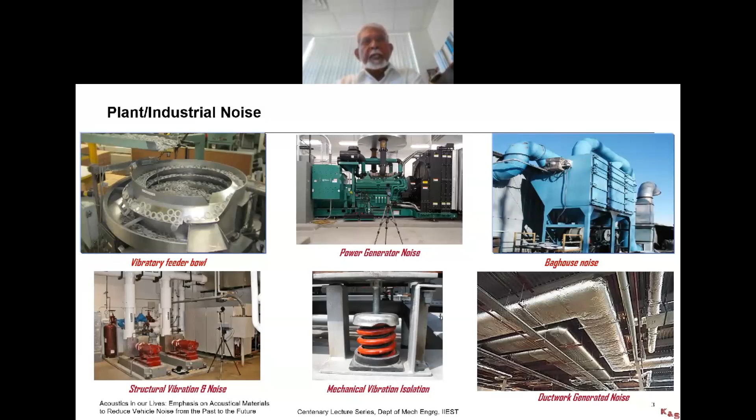We will talk a little bit later when I come to my favorite topic on vehicles about different types of noises. This is a heating, ventilation, air conditioning duct work, which otherwise would generate noise in an acoustic lab where you can't accept that because you want to make measurements of your product in a quiet environment. So these are some different examples or applications of plant or industrial noise that we see every day in one shape or the other.

Some of that noise now comes to the community. This is, I'm making measurements in the property line of the community. This is the transportation noise on these freeways, highways, byways, all these cars and trucks and other transportation systems that are going by, they're generating noise, and that noise eventually comes to the residential area. To block that noise, sometimes we have walls. These walls separate the freeways from the residential areas.

We can do modeling. In today's technology, we would like to do analysis, model, predict. And these models allow us, this is my noise source. This is a pillar or a block or a building, and how does the sound then propagate or radiate to the rest of the neighborhood? If I can determine that, that'll be very helpful.

Sometimes when we make these measurements, we want to look at the noise level with time history. So this particular bottom left slide is showing you the x-axis, the horizontal axis is the time, the vertical axis is the sound level in dBA. It shows you different events that are taking place and for how long those events are taking place. These are all important if we want to reduce the noise so that in the community, people would be in a little bit more pleasant situation.

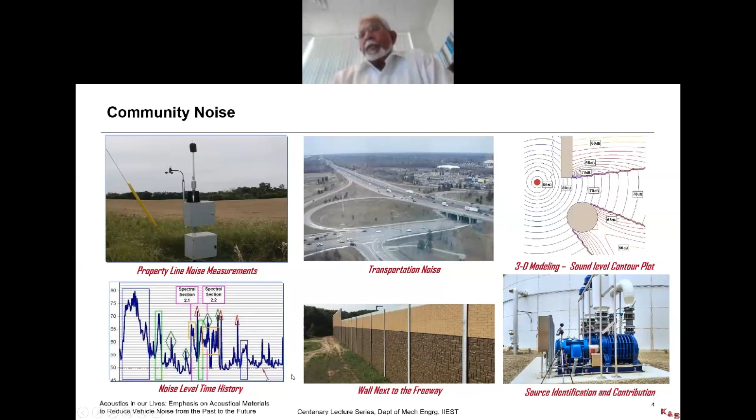This one is the previous slide. The bottom right picture was trying to show noise measurements of the product in the community.

Architectural acoustics. We like to enjoy music. Obviously, the artist is famous, no problem. But the auditorium has a lot to do with it. It's not just the loudspeakers and the microphones. It's the room itself. So these are the seats where people are going to be sitting, and then somewhere here is the stage where the musicians are going to perform from.

We can do ray acoustic analysis. These are the seats. This is the performer. The sound goes up, reflects back, comes to the people who are sitting and enjoying the program. We can determine how much of the sound coming from the speaker or the artist is going to reflect back at different locations.

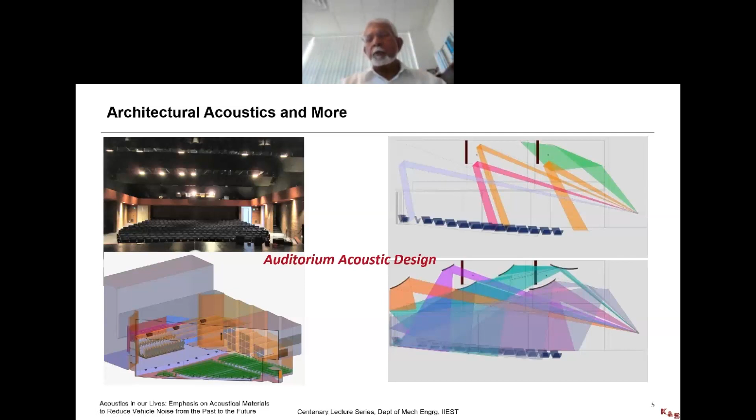Based on that, we may have to add additional diffusers, as you can see, so the sound is more even in that space, as opposed to the very first slide on the top right, which has very discrete sound rays coming. At the end of the day, I would like the entire auditorium to be filled with the sound, the music that we would like to enjoy and appreciate.

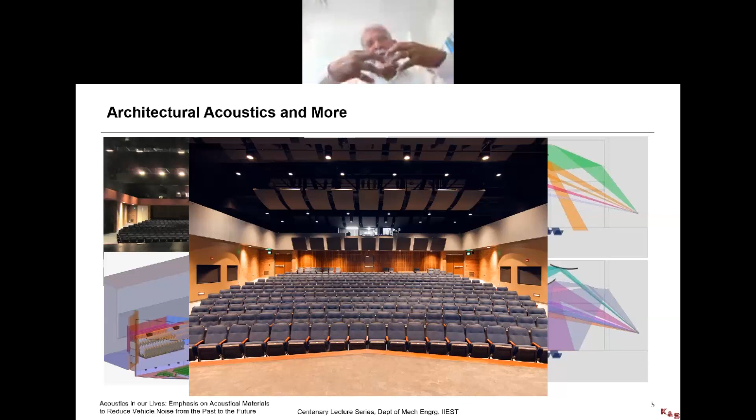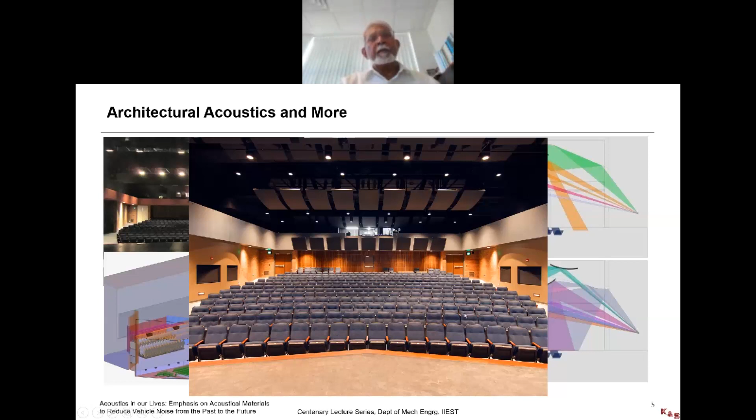So this is what it looks like at the end of the day, where you see all of these surfaces. These are all diffusers or reflectors. They have been specifically designed and placed so that the sound coming from the musician, coming from the loudspeakers, can reflect off and properly disperse where the audiences are sitting.

Now I want to talk a little bit about binaural work. Binaural means the two ears that we have. This is very important because if we can simulate in an artificial head the human hearing mechanism in terms of the spatial separation between the left ear and the right ear and the directionality, then I don't have to always listen to that sound myself. I can use an artificial head with microphones on the outer ears of both ears, record that signal and process it later to understand how we really hear.

Normally, all sounds are measured using a microphone. A microphone measures a scalar quantity, just the magnitude. It cannot give me any direction. But with the binaural head, using the two microphones and the spatial distribution of how we hear, all those algorithms, it can not only give you the magnitude, it can give you the direction the sound is coming from.

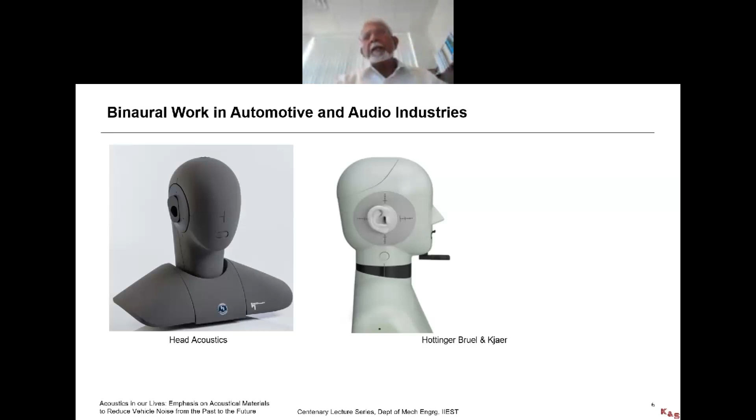If I take this a little bit more advanced, this is another mannequin where sound comes through the mouth because I have passed a signal through its brain. And then there is a loudspeaker here. There's a microphone here. The microphone picks up that signal and then it goes through various algorithms to determine the clarity of that sound that came out from somebody's mouth in a given environment.

Some of you may have heard a term called articulation index. Articulation index means how well can I articulate in a given environment. If I go to a restaurant, everybody is talking. Even though somebody is sitting within a meter from me, I speak and the person cannot hear me very well because the clarity of the sound in that environment is not very good. So in architectural acoustics and vehicle acoustics, articulation is very important, and that's what one of these things can do.

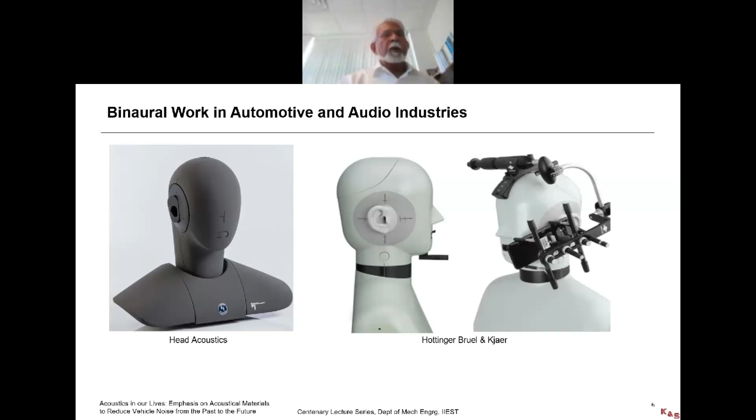Nowadays, we all have iPhones, cell phones, modern phones. We don't want to say, can you hear me? Can you hear me? We want to be definitive that we can hear everybody very well. And this device you can see on the head is actually a rest so that this cell phone is placed properly, putting the right pressure on the ear, the way we would normally hold the cell phone to communicate with someone else.

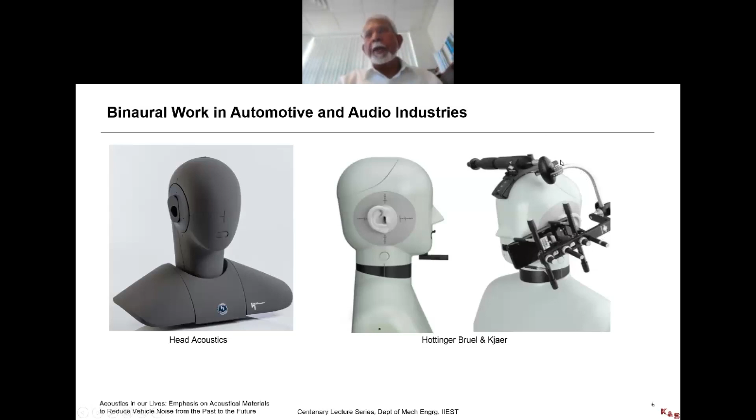And then we send the signal through the mouth. The cell phone picks up that signal, and then we can analyze that data to understand the clarity of the sound. How much force I put on my ear with the cell phone can all be simulated by this big gadget that you see on the head of this mannequin.

Okay. The next thing we are going to talk about a little is how we get from there to here. Now we are getting more into the vehicles.

Building a car has to do with designing the car, development, and its execution. Understanding the noise problem, if you're going to worry about acoustics in the car: we need to know the frequency contents. We need to know the level. We need to know in what environment am I putting these materials.

We listen to the car both subjectively and objectively. We do it subjectively because we want to like the car. We want to understand something called the sound quality of that vehicle. We want to make objective measurements because we need something concrete which we can analyze, which we can rely on to make sure I do the job correctly.

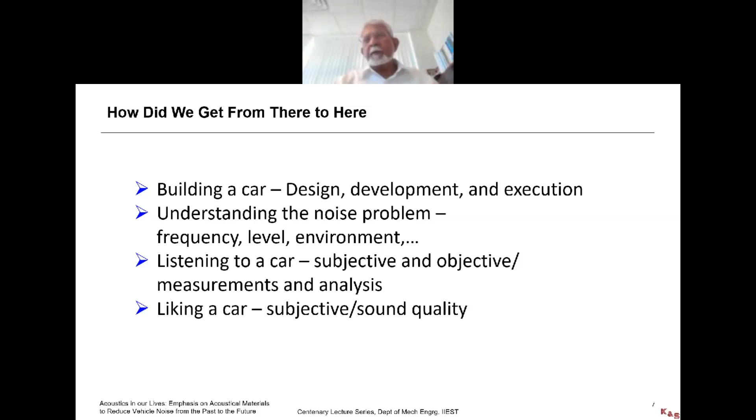Today, my mood is bad. Subjectively, I think it's a noisy vehicle. Tomorrow, I'm very calm, I'm in good shape, feeling very well. The same vehicle that I heard yesterday and complained the noise was too much, today I think it's acceptable. So that's the way the subjective thing works. We cannot rely on that 100%. We need to have objective measurements. We need to be able to analyze and predict information.

In vehicle construction, there are even today two types of vehicle constructions. One is called a full frame. When I say a full frame, that means you have a chassis. The engine is sitting on top of the chassis, and the body is installed on top of that chassis, and the body is mounted to the chassis by something called body mounts. Body mounts acoustically are nothing but isolators.

The chassis is very hot. That means it has lots of energy because the wheels are driven on bumpy, rough roads. So all that vibration energy gets through the tire to the chassis, but the body is isolated from the chassis by using body mounts so that vibration doesn't go through. The only thing that goes through would be the noise of the internal combustion engine, or if we have electric motors, the noise of the electric motor. So the noise we have is airborne noise. The solution for airborne noise is different than if I had vibration issues as well.

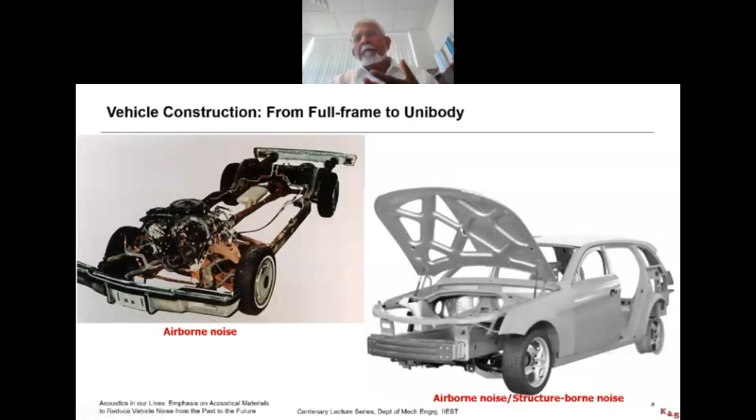Today we have unibody construction vehicles where the chassis is gone. That is necessary for the safety of the vehicle, not necessarily for acoustics. Safety is more important than acoustics on any given day, because after all, we're not going to lose our hearing from the noise in vehicles. So we have unibody construction vehicles, and therefore now the body panels feel the vibration directly, and we need to reduce that vibration.

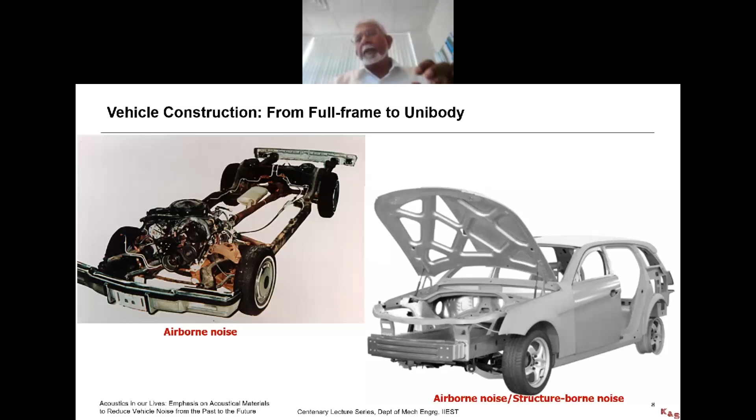Because I don't have a chassis, I'm not going to be able to use an isolator. In order to reduce the vibration on the body panels, I need to use viscoelastic materials, damping materials. That vibration is called structure-borne noise. Damping materials were not used in vehicles until the late 1970s, because around that time we started building unibody construction vehicles. So although viscoelastic materials were well known to acousticians and had been well used all this time, in vehicles it's a new product.

If we now look at the vehicle noise sources, there is propulsion-related noise. That means the moment I start the engine of one kind or the other, I have a certain amount of sound. And then when I operate that vehicle to go from place A to place B, I have additional noises. For internal combustion engines, which we fondly call ICE, the propulsion-related noises are engine noise and transmission noise. The transmission is nothing but a whole bunch of gearboxes, gears. Then we have cooling fan noise, air intake noise, and exhaust noise.

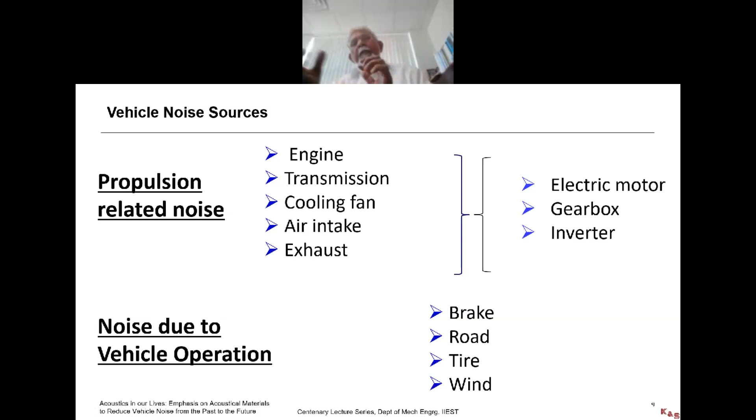For electric vehicles, we have electric motor noise. We have gearbox noise from the electric motor going to the wheels, and then we have inverter noise and other things. The moment I'm driving the vehicle, in addition to this propulsion-related noise, I have road noise, tire noise, wind noise, and brake noise.

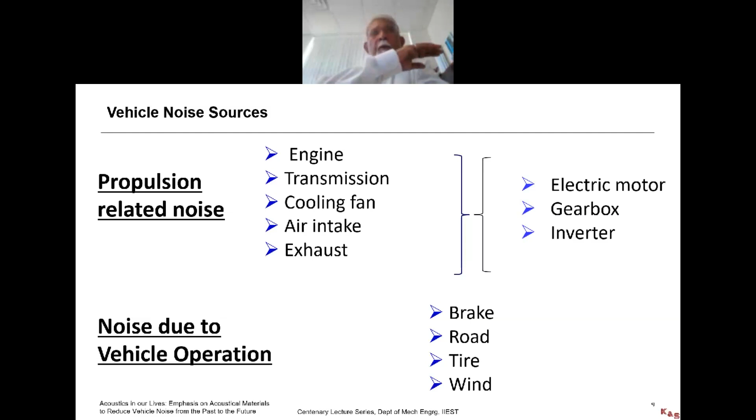So when you drive or ride a vehicle, even though you are riding on the same road surface, some vehicles you don't like the noise of because you hear too much wind noise or too much propulsion noise. Some vehicles you like because those noises are all addressed properly. It's very smooth, it's more balanced, and things like that.

If you look at an internal combustion engine, the primary noise source is the circled one here, the internal combustion engine itself, and then the exhaust noise that you have. Then you have wind noise as you are driving the vehicle. You have tire thump as you are driving the vehicle. And you have many other different types of noises.

Inside the vehicle, you may have air conditioning, or like here, we have to have heaters for sure because it gets very cold. So all those noises are there also for our pleasantness that we would like to have. But the primary noises that we are talking about are the propulsion related noise and the vehicle operation related noise.

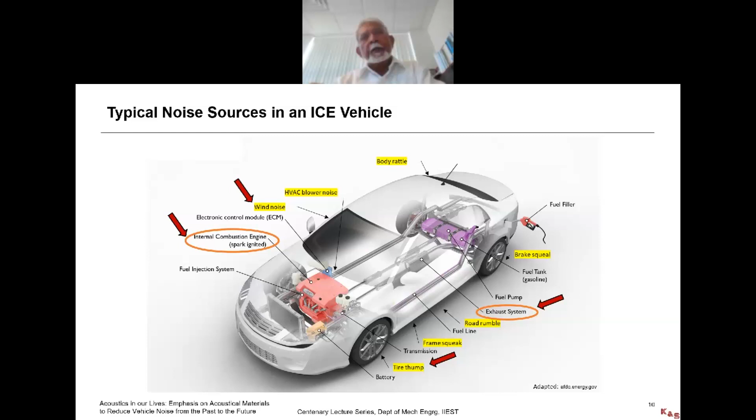In order to solve this properly, we need to understand at what frequency ranges we have these noises. So for an internal combustion engine, there's an induction noise. The induction noise is related to the number of cylinders and the RPM, and that frequency range is somewhere from 50 hertz to about 200 hertz or so. At those frequencies, it is very difficult to solve the noise problem using sound package materials. So we will see if there are other ways to address those things, and some acoustics engineers will work on that.

But then I drive my car. Sometimes I drive on a smooth road. Sometimes I drive on a coarse road. Sometimes there are loose gravels, and they all generate noise at lower frequencies, below 500 hertz or below 1000 hertz. Then I have the engine or accessory noise. That noise is from 400 to 4000 hertz.

The tire noise: I'm driving my vehicle at 60 kilometers per hour or 50 kilometers per hour on a smooth road, and I hear this tire noise. That's around 800 to 2000 hertz. Now I'm on the freeway, on a smooth road. I can drive at 100 kilometers per hour, and I can hear the wind noise. The level of the noise is not that high, but the frequency range of the noise is at a frequency that I can tell the difference. It's 2000 hertz and above.

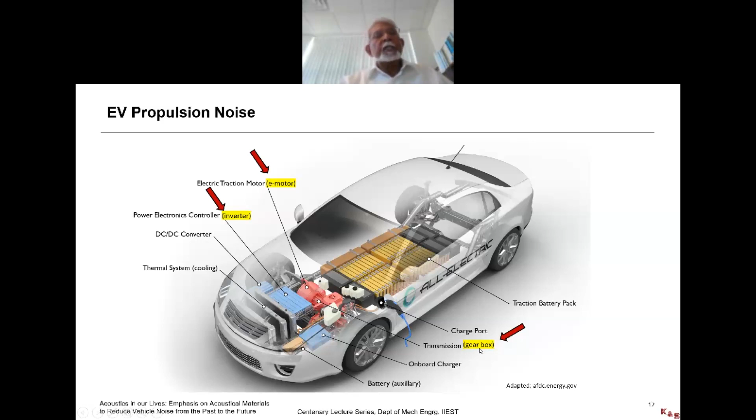Right now, I just wanted to mention the electric motor itself makes noise at different frequencies that we were not used to hearing before. Then it has inverters to change the battery voltage to be able to run the electric motor. That inverter makes noise. We have gearboxes. The transmission itself makes noise. So there are noises in electric vehicles.

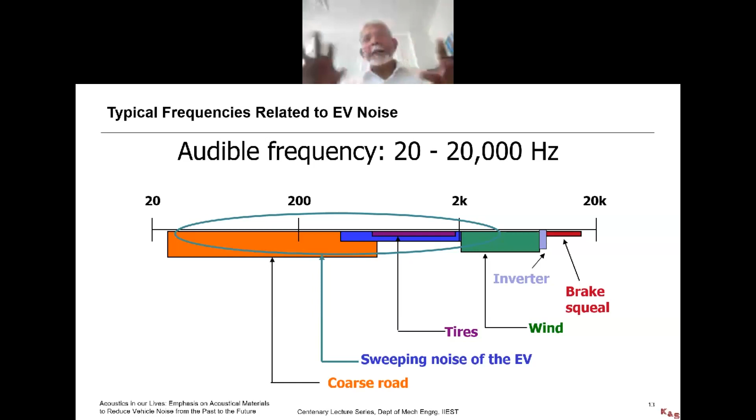In addition to that, as I'm going from place A to place B, all that coarse road noise, the tire noise, wind noise that I had before, they are also present in the electric vehicle, even more so now because the internal combustion engine's noise was masking some of that road noise, some of that wind noise. So just because I have an electric vehicle doesn't mean that I don't have any noise. I still have noise of a different level, but at different frequency ranges that I was not used to hearing before.

So for me to solve all these problems, I have to first acquire the data. People have been building cars for over 100 years, and people have been working on having quieter cars for at least 50, 60, 70 years. So I'm going to take you through some of the technologies that we had before and what we have today. We want to acquire the data. In the early days, we did not have battery operated recording devices. So we had to plug it in and have 220 volts or 120 volts, whatever the regular power supply is. And we used tape recorders.

When I talk, you hear sound from a very low level to a very high level. And that dynamic range could be about 100 dB or so. Those tape recorders that we used before were reel-to-reel tape recorders. Some of you students may not even know what a tape recorder is. That reel-to-reel tape recorder has a dynamic range of about 30 or 40 dB. Okay?

How are you going to capture the noise of the vehicle, which can range from a very low level to a very high level with a dynamic range of 90 dB or so? Those become very challenging, but we did it. We did it one way or the other.

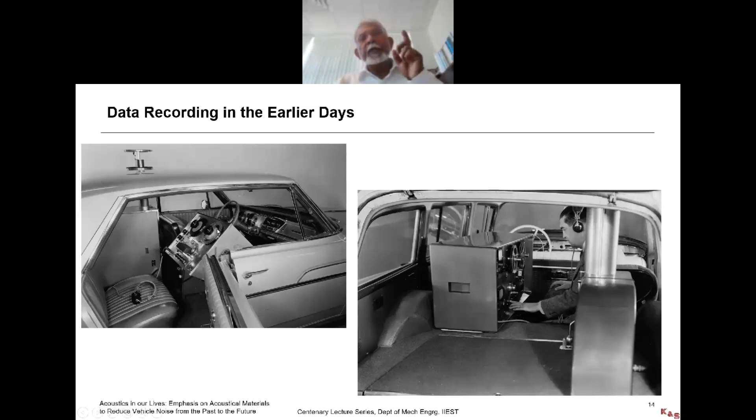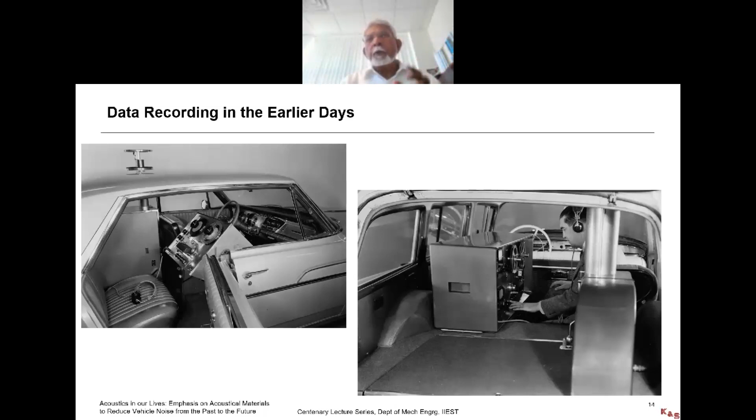So here you see a reel-to-reel tape recorder, put in the vehicle. At home, it's not a problem. I can plug it in to the electric current. But in the car, what am I going to do? I have to have an inverter. This inverter is going to transfer the DC voltage of 12 volts to 120 or 220 volts to operate that. Okay, that's fine. How am I going to get that current? I'm not going to have a mile-long cord to run this vehicle.

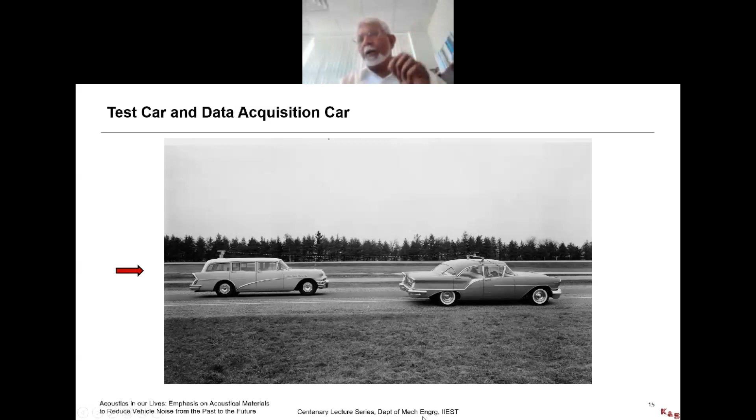Again, this room has nothing to do with the vehicle measurement I'm making. But if this room is not acoustically designed properly, I will not be able to listen to the sound, appreciate it, and enjoy the vehicle noise. A room like that is also sometimes designed to test vehicles indoors.

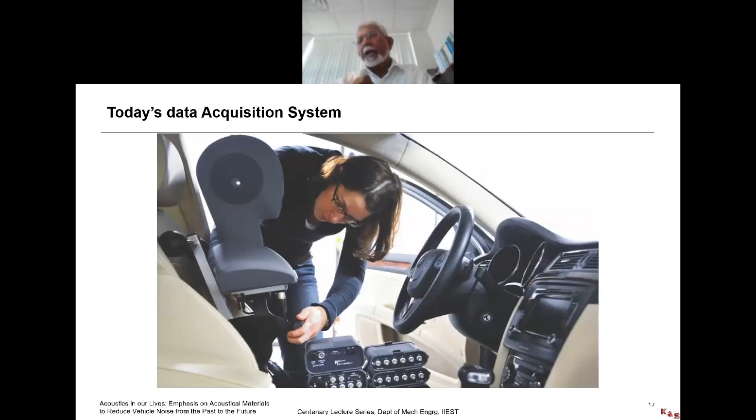In today's technology, we have much more sophisticated equipment. These are all battery operated. And I have this artificial head, the binaural head, that I can connect. Then I can drive the vehicle on the test track, make measurements, come back and analyze the data or listen to the sound. On-road measurements are fine. Everybody makes on-road measurements because that's where we are going to drive the vehicle. In India, you have NATRAX, a wide proving ground where car company people or their suppliers may come and make measurements.

But there are also chassis roll dynamometers. Chassis roll dynamometers are large wheels in a building where you put the vehicle, with the tires on top of those wheels. As the wheels are in motion, the tires will be running. Your vehicle is in gear. So the vehicle is not literally going from place A to place B, but the tires are rotating. And as the tires rotate, the engine RPM is changing, the speed is changing. You are hearing noise. You are making those measurements.

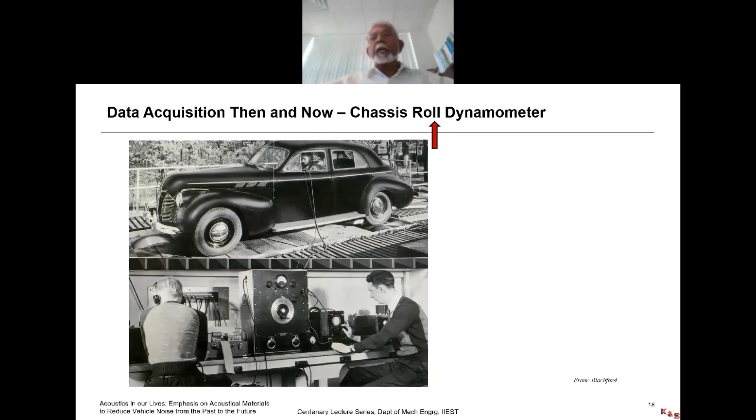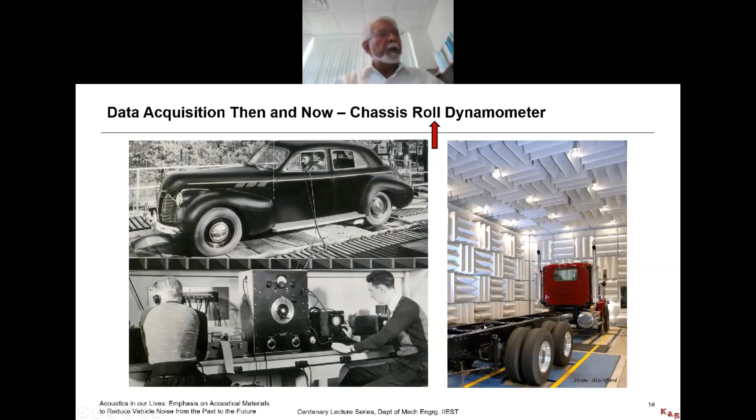This was one of the first chassis roll dynamometers built by the OEM, in an open-door or outdoor environment. Because usually you put this in a room called a hemi-anechoic room. Hemi means half, an means no, echoic means reflection. That means a room with no reflection in half of the space, because that way I can simulate outdoor conditions. In today's technology, you're going to have this hemi-anechoic room, and you're going to have this truck, and you're going to make these measurements in the lab.

Sound package treatments and parts. Depending on sound, we may have absorption treatment. Absorption is a product that receives the sound energy, dissipates the sound energy within the material, and doesn't allow anything to reflect back. Then we may have barrier materials. Barrier materials are installed between the source and the receiver so that it can block the sound.

To give you an example, a door is a good barrier, and the carpet or the cushions that we have, those are good absorbers. We use that for airborne noise. For structure-borne noise, we may have isolators that I talked about before, or we may have damping treatments that I have also mentioned before for a unibody construction vehicle.

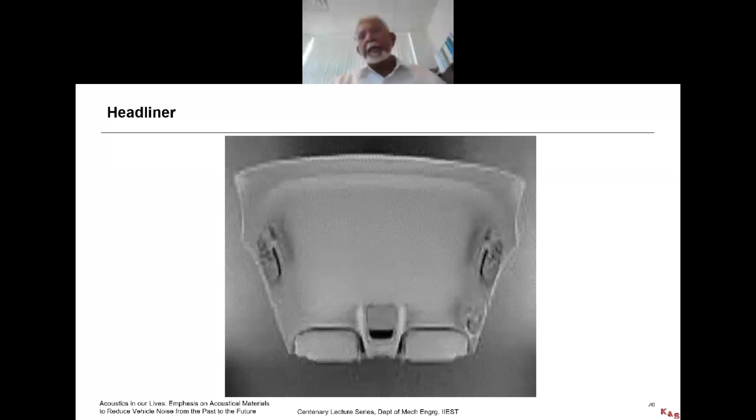And these are all many different types of parts that we have in a vehicle. Some of them are cosmetic parts, cosmetic because you see it, but it has another function, which is acoustics. For example, this is a headliner. When you sit in the car, you look up, you see the headliner. So the headliner manufacturer puts a lot of effort to make sure it looks right. But it can also provide a lot of acoustics in terms of absorption.

Between the engine compartment and the vehicle interior, we have something called a dash liner. Some people may call it a dash mat or a dash insulator. On the left-hand side, this is the dash insulator, which is based on a barrier decoupler system. All it means for our purposes today is it blocks the sound.

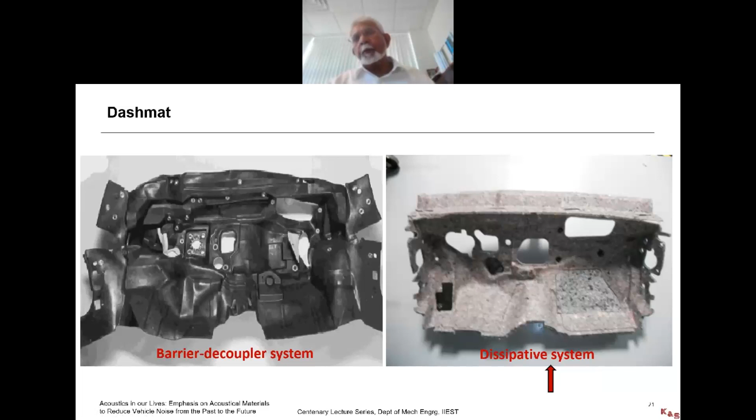On the right-hand side, it is a fibrous material. It's a dissipative system. Dissipative system means it dissipates the sound energy. It works on its absorption properties, but it can also, by the process of dissipation, reduce the noise as sound goes through the material to the other side. The advantage of a dissipative system is a lighter weight than a barrier decoupler system. That goes back to the same things that Pankaj Mallick at one time talked about in composites and other things, that we are trying to reduce the weight in vehicles.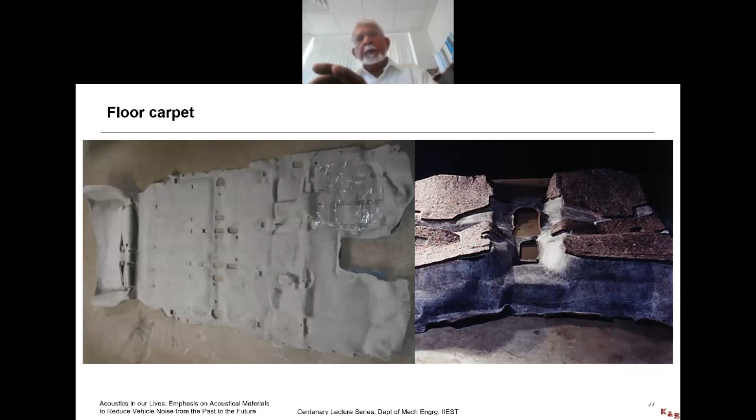Typically in a house, underneath the carpet, you have foam cushion materials so that when you press on it, you don't feel the hard surfaces. You feel some cushion that gives you some comfort. And this is called carpet underlayment. At one time in vehicles, we used to use jute as a carpet underlayment material. It used to come from India. It used to come from Bangladesh, or East Bengal at that point, and then Bangladesh.

But then there is cyclone, there's flood. This crop gets affected, its transportation gets affected. The car companies in the Western world cannot rely on that schedule. Therefore, they started looking into other options. They started looking into cotton fibers. In North America, in the southern states, we have cotton, we have cotton fibers. We can grow that. In Europe, they used to work with foam.

So one of the problems of this needled cotton fiber is when you make the part and stack 50 or 60 of these floor carpets one on top of the other, the bottom 10 or 20 get crushed. These fiber pads don't maintain their thickness anymore. They get squeezed. When you did the design of that vehicle in the early stage, you designed it such that underneath the carpet, there will be so much room so that the carpet will fit there properly.

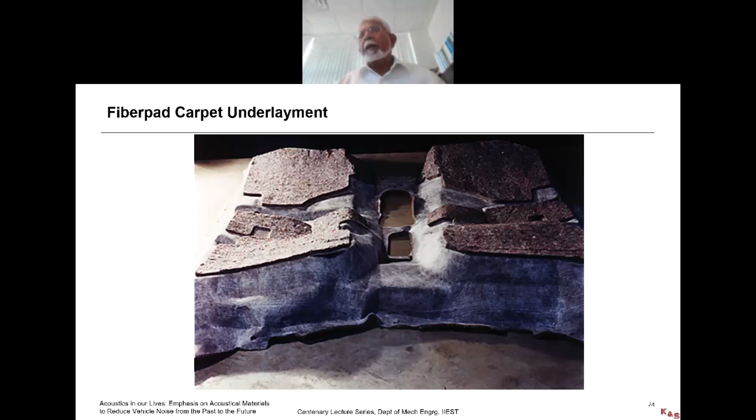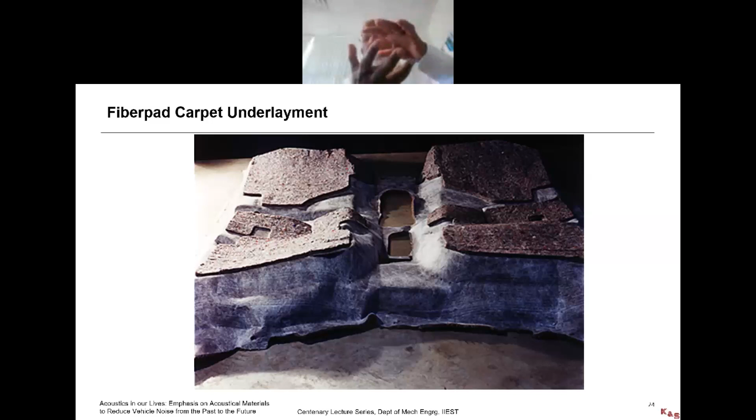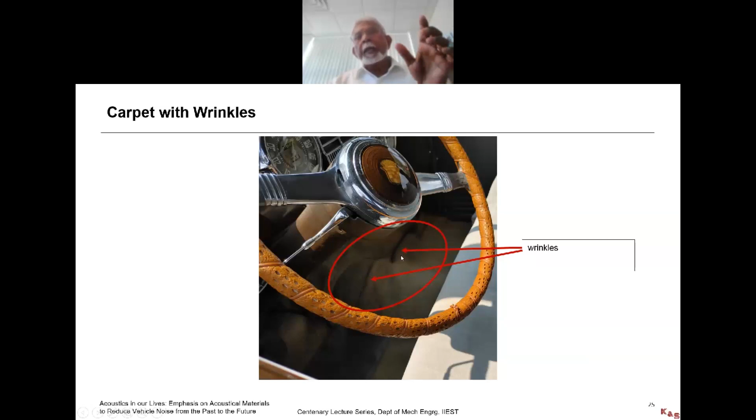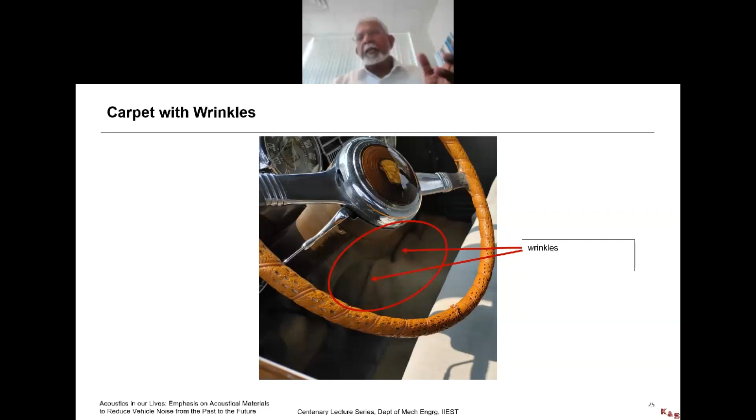If that room was 15 millimeters, and then in transportation, in stacking one on top of the other, they got squeezed to 10 millimeters, now the carpet is not going to fit there properly. It is not going to look right. And here you can see these dark lines. They look like dark lines, but what is happening? The carpet got squeezed. There is excess carpet there. There is air behind that. It's not sitting there properly.

So people started looking into working with foams. Europe was already advanced in that area. They always used foam. They like to use foam.

So this is the foam which you can pour properly. It will go behind the carpet, underneath the carpet. It will mold properly, so your fit would be perfect.

Today, with the weight situation, with the energy situation, we are trying to reduce the weight. We are trying to reduce the weight not only on the body panels, but also on the sound package materials. If I can go from that barrier system to a fiber pad system, and if I can reduce the weight by about 30%, I've gotten some improvement in fuel economy. That is going to come also in electric vehicles.

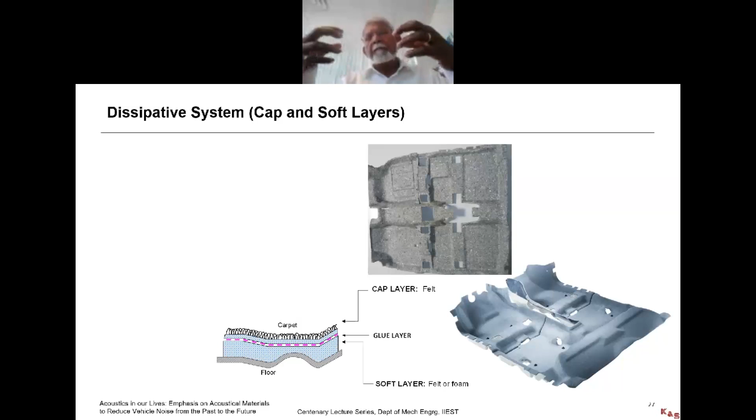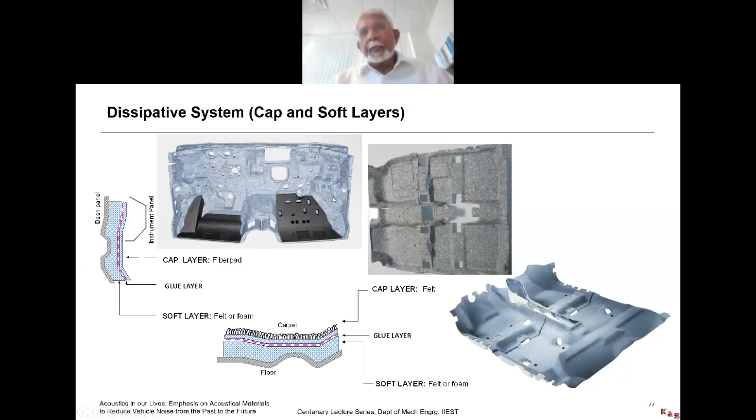So this system is based on two layers of fiber pad. One is more compressed and one is more lofty. That way, the energy dissipation is emphasized properly, and it can reduce the sound propagation more effectively. You will see that on the floor carpets. You will see that also on the dash mats.

I'm going to now move on to the EVs and the AVs, the electric vehicles and the autonomous vehicles that are here, that will be coming. The EVs are coming because of the fuel economy, the energy crisis, and we want green, other things. EVs are going to be more popular in my book because of China and a few other countries.

But then there will be AVs that will be there for us when we will not be able to drive our vehicles anymore, but we still want to be independent. So an autonomous vehicle would allow me to go from place A to place B without my driving the vehicle and so on. But what I wanted to mention, as we have EVs, the internal combustion engine is gone. It is all of a sudden a vacuum.

The internal combustion engine, which made noise between 400 to 4,000 hertz, also masked, that means it hid, a lot of sounds which are related to low frequency wind noise or road noise. Now that that is gone, the road noise, the wind noise and some other ancillary device noises or buzz, squeak, and rattle at lower frequencies are becoming very prominent. Their magnitude may not be that high, but the frequency content is such that our ear can tell that. And we don't like it because that's not what we were listening to before.

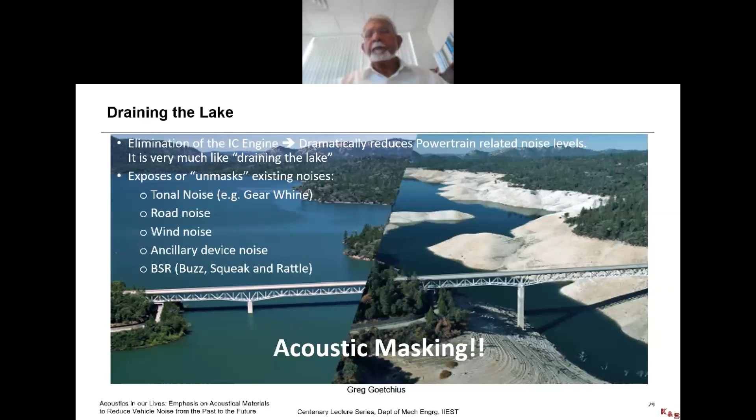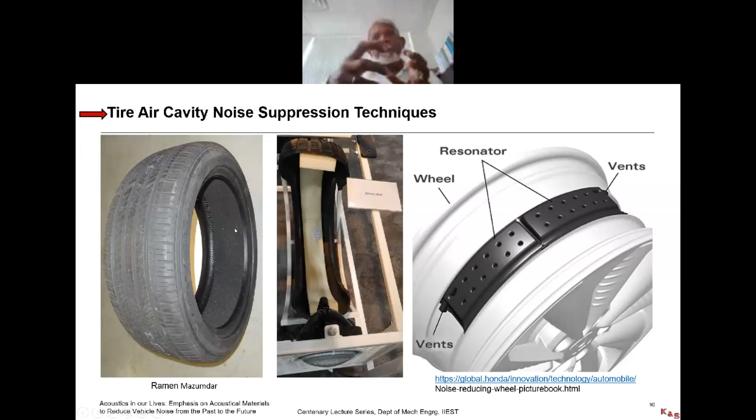We have had tubeless tires for quite some time. And the moment we went to tubeless tires, between the rim and the tire, there is a cavity. In that cavity, there is a resonance, around 200 hertz. So it generates sound. In an internal combustion engine vehicle, that sound was there, but we never really paid much attention because of the other noises of the internal combustion engine.

Now that we went to electric vehicles, where the electric motor noises are at higher frequencies, the inverter's noise at a higher frequency, that tire cavity noise is becoming important. Here you can see in the tire cavity, somebody has put in foam, which is an absorption material bonded to the inner part of the tire. Here you can see that foam.

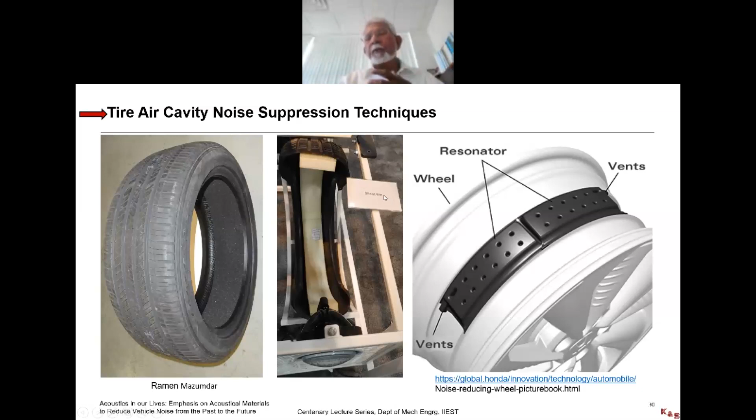Some other car companies, some other suppliers, are trying to see if we can have resonators so that the sound that is generated can be tuned through the perforation of these resonators so that it will mitigate that sound. So there are different ways of addressing that. But my point is that noise was always there since the day we went to tubeless tires. But today that noise has become more important because of electric vehicles, because of luxury vehicles, than yesterday when most of the vehicles were internal combustion engine.

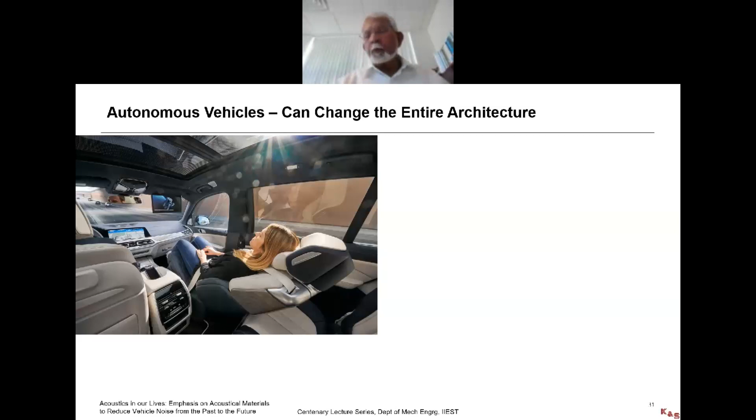Autonomous vehicles can change the entire architecture. It can change the entire internal design of the vehicle. Now somebody sitting in the car can relax, can do whatever they want to do, can have their business meeting. And when you have your business meeting and you like to have more glass, more openness, the noise from outside through the glass can come inside very easily.

Glass has a positive thing, I can see through it, but glass also allows sound to come in at some specific frequencies more easily where our voices generate sound. So we have to be careful. Just because it is an electrically driven autonomous vehicle does not mean I don't have any noise issues.

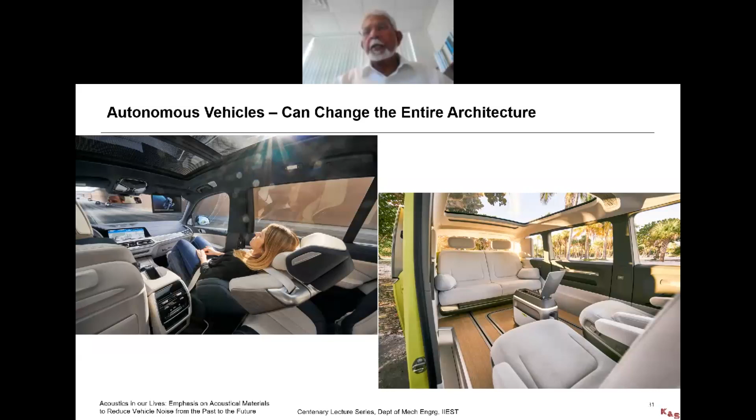Of course, there are concerns of the safety because depending on the safety restraint systems, they need to be working properly. Now that I've changed the entire architecture, I want to make sure that I don't violate those restraint systems.

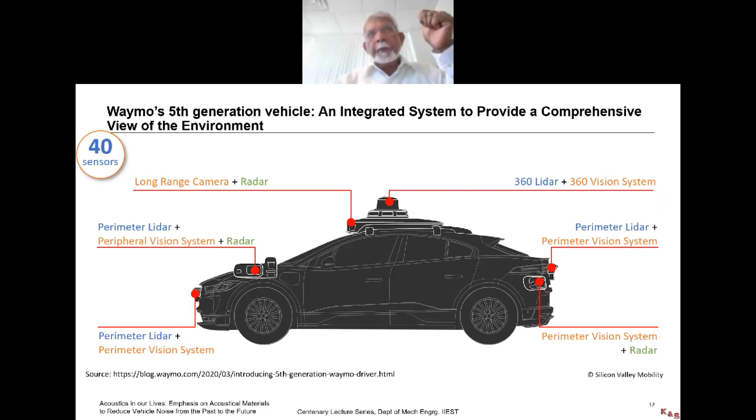If we go into the autonomous vehicles, there are three sensors: a camera, a radar, and a lidar. Camera, it can detect where the object is, can detect the color. However, if the weather is not good, it cannot work very well. If the lighting is not great, it may not be able to work very well. Its velocity estimation and distance estimation is not very good.

The radar, which works on the detection system used by radio waves, it can identify the object, it can identify what distance away it is, the velocity detection, it can work in bad weather, it can detect the range. But the object classification may not be that great, the lane tracking may not be that great, and the angular resolution isn't that great.

If we go to the LiDAR, which is the detection system which works on the principle of radar, but uses light from a laser, then I have object detection very good, angular resolution is very good, but still the lane tracking, the operation in heavy rain or bad weather, those things are not that great.

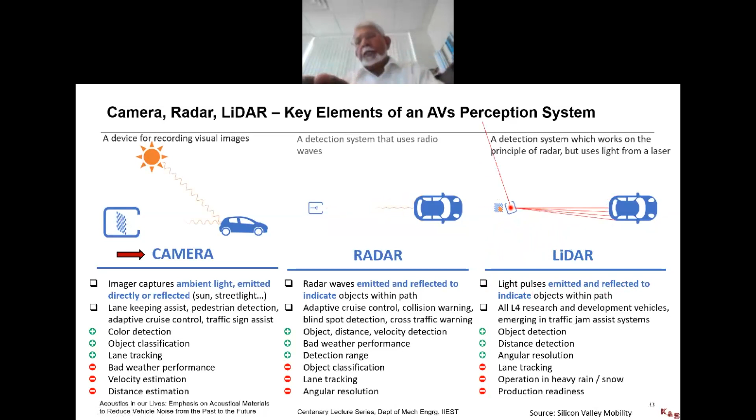So what it is telling us here, for different sensors and fusion, camera has some areas it performs very well. The radar performs very well in many areas. LiDARs perform well in some areas. We can fuse some of these things, we can blend some of these things, and we can get the best of the best that may be necessary for this case.

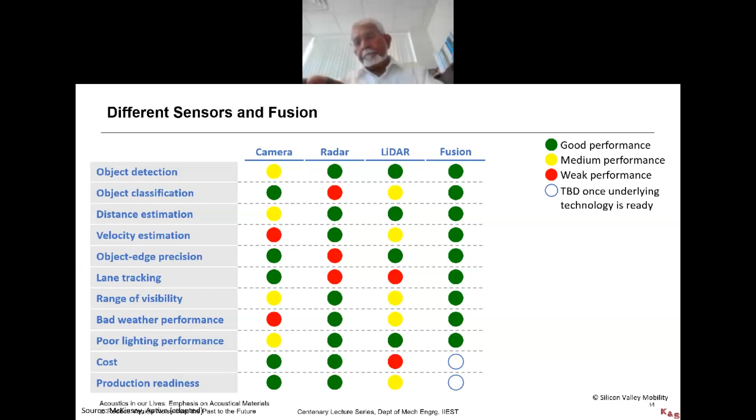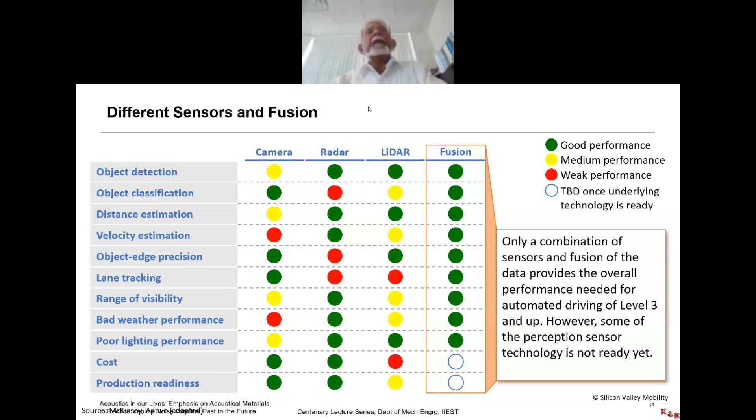With that, this actually concludes my presentation, but I would like to see if I can play a video. If I have any trouble to stop.

Okay. Now what did I do? Any questions?

Well, thank you, Dr. Shah. Very nice coverage of the subject. And very nicely presented, I must say. Not fast, not too slow. Coverage is very nice. And there must be some queries from audience. So it's now open to the floor. Any queries? Including those from our scholars or students? Even though I don't see many scholars here, but some are still there.